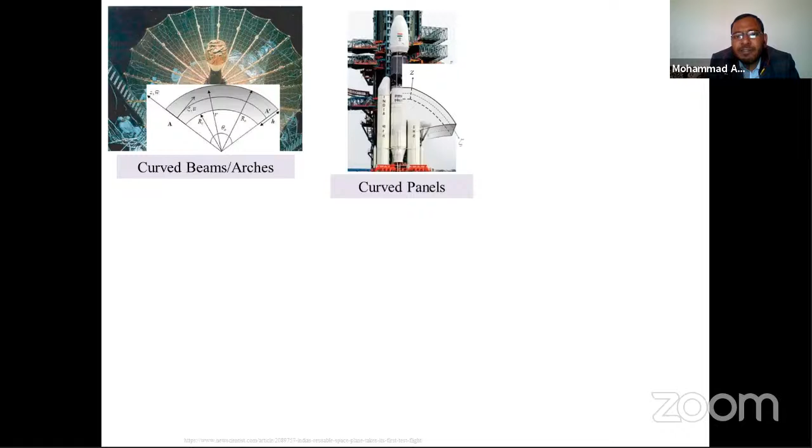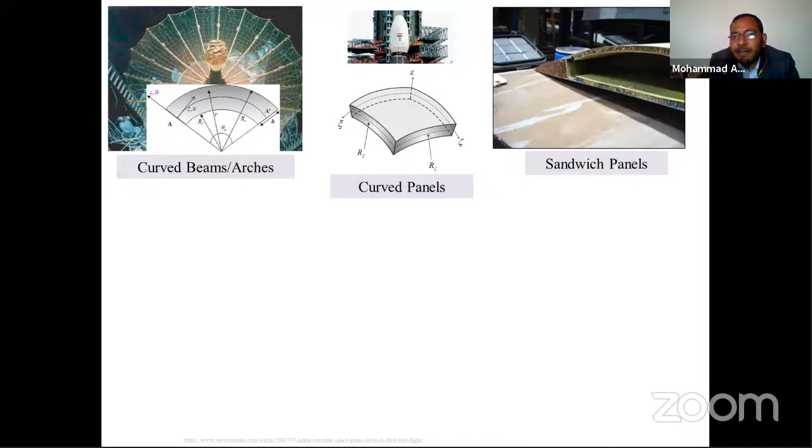Functionally graded materials, like curved panels, can also be used in various aerospace structures, like this Chandrayaan project, I think it's ISRO's project. The functionally graded structure made of graded cellular core makes it very useful where we need very low weight and good strength, meaning very good specific strength and specific stiffness. So we can use this structure in aerospace industry also.

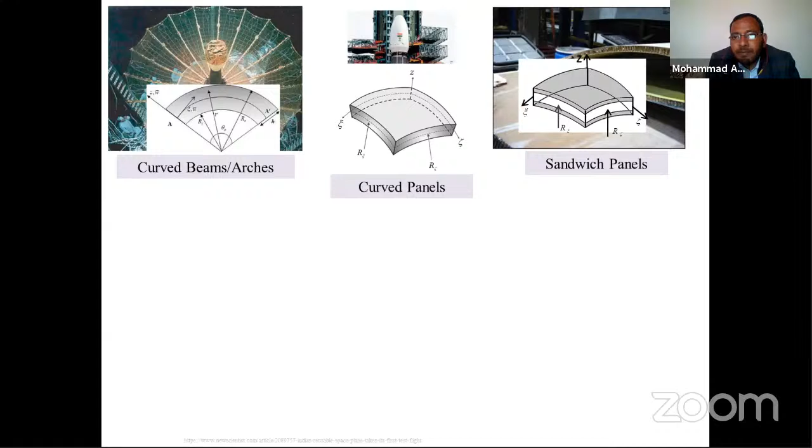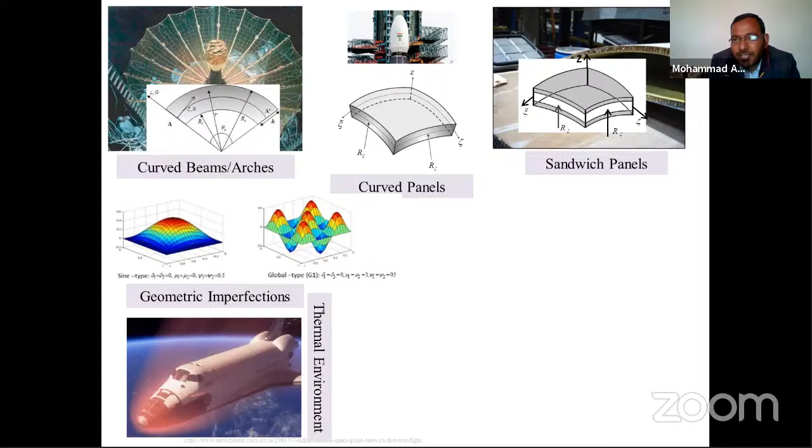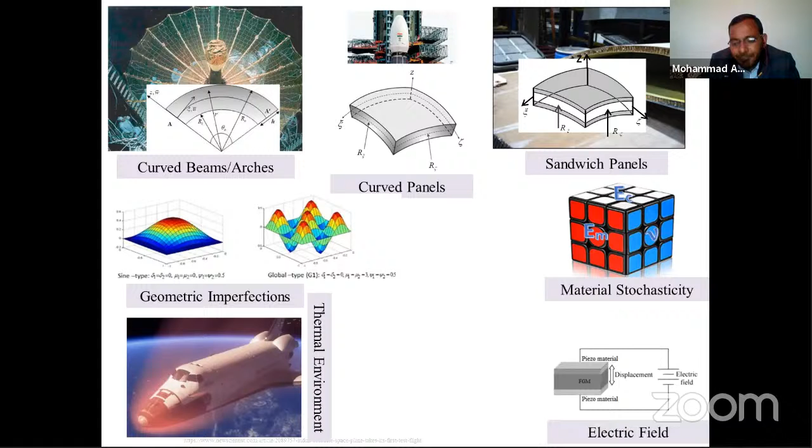For analyzing these complex structures and materials, we need to incorporate various influencing parameters like geometric imperfections, which is just unwanted distortion present in the structure. Another influencing parameter is environmental condition, when entering into the atmosphere any plane or object faces very high temperature thermal environment conditions, so it must be included in the structure so we get a more reliable structural response. And material stochasticity, since there is always randomness in the structure, we have included randomness in the material properties. And the effect of electric field. By incorporating all these influencing parameters within the kinematic model, we get a more realistic and accurate structural response.

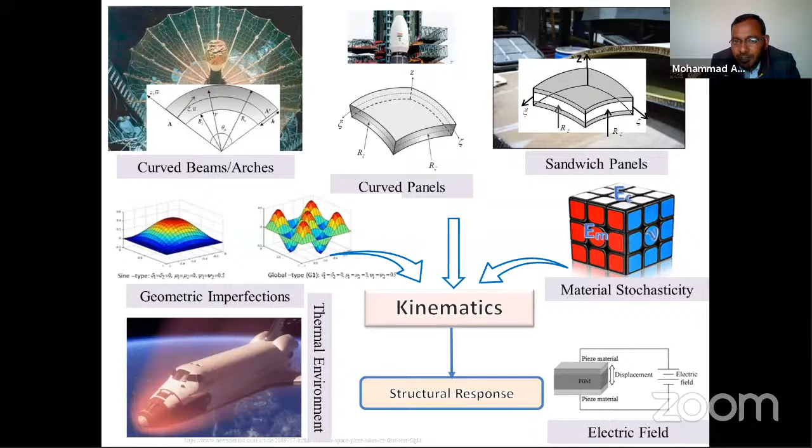What is the functionally graded material? Functionally graded materials are very advanced composite materials in which either composition or microstructure varies locally during manufacturing, due to which mechanical and thermal properties vary smoothly and continuously in the preferred directions. This gradation in the material properties reduces stress concentration, thermal stresses, and residual stresses. What is the functionally graded material? Here we are talking about the material.

Basically, functionally graded materials are categorized into two groups. One is functionally graded material due to variation in composition, and another is variation in material properties due to variation in their microstructures. For type 1, it's just variation in composition, generally made of ceramic and metal. So the functionally graded material is made of material A and material B, generally ceramic and metals. The composition varies from one surface to another, and accordingly the material properties also vary in that particular direction.

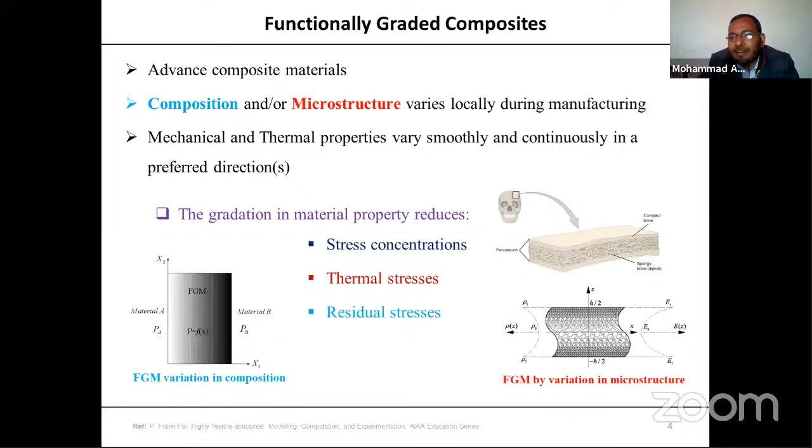The functionally graded structure, or cellular structure, is where the variation in material properties is due to variation in the microstructures. It is also available in nature, like we can observe in bamboo stick, bone, or even skin. These also have gradation in their material properties. Like bone, when we observe from outside it's hard, and when we go inside it starts becoming spongy.

Application of the functionally graded structures. These are very useful in various industrial applications like aerospace, nuclear reactor, medical applications, and energy. The graded cellular structures, as discussed earlier, are very similar to bone, so they are very useful in case of artificial bones and dental cases.

They can be used as bone implants or dental teeth implants. Another feature: functionally graded materials are generally made of ceramic and metal. These structures can be very useful where exposed to high thermal environment conditions, because ceramic can withstand very high thermal conditions, while metal, since ceramic is generally brittle, when mixed with metal also provides toughness. So these structures are very useful in aerospace applications where exposed to high thermal environment conditions.

It can be very useful for nuclear reactor walls, and many other applications like sports. Nowadays different building materials and sports goods are prepared from functionally graded materials.

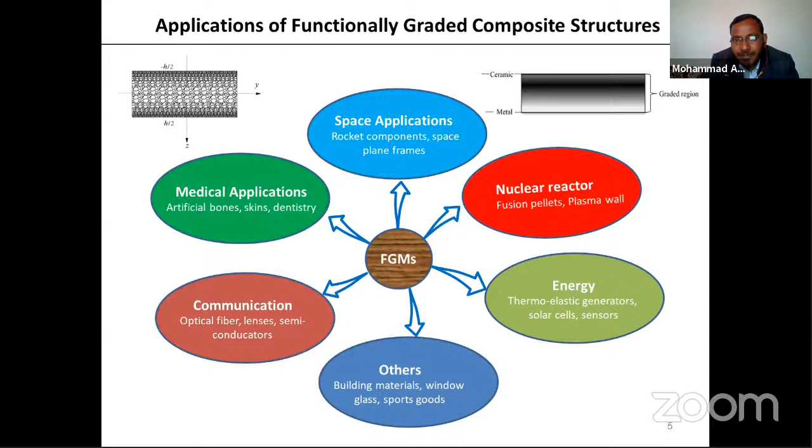Now, this is how we obtain the gradation in the material properties. Here we are discussing the functionally graded material made of ceramic and metal, a composition or mixture of ceramic and metal. The effective material properties vary in the thickness direction only, and for that we consider a power law distribution, where the volume fraction of the ceramic depends on the thickness coordinate z by h and the index n.

By selecting the value of n, we get different volume fraction indices, meaning different volume fractions of the ceramic. Using the rule of mixtures, the volume fraction of ceramic plus the volume fraction of metal equals 1. Accordingly, using the rule of mixtures, we get effective material properties of the structure like Young's modulus, density, Poisson's ratio, and other mechanical properties.

So Ez is equal to Ec minus Em, multiplied by the component volume fraction of the ceramic, plus Em. Here we can choose the value of n for different materials.

If we select n equal to 0, it will purely behave as a ceramic material, since this component becomes 0 and, by putting n equal to 0, this becomes 1. Then Em and Em get cancelled, and it acts purely as the ceramic component.

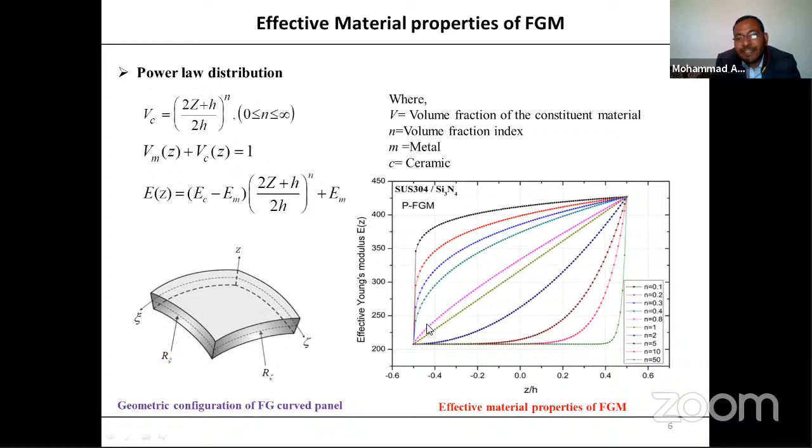Now we discuss another kind of functionally graded structure, generally called the cellular structure. Based on the open cell approach, we have obtained the effective material properties and how they vary along the thickness direction.

From this figure we can observe that the porosity is maximum at the center, while the top and bottom surfaces are generally less porous. So the effective material properties will reduce the most at the center, while the top and bottom surfaces will reduce less.

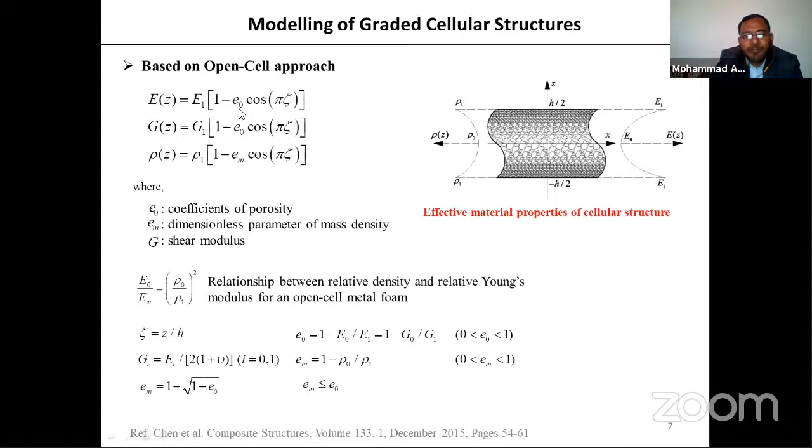The effective material properties can be obtained using this formula. In our study, we considered three different types of pore distribution in the graded cellular structures: type 1, type 2, and type 3.

Sir, we lost your connection.

Maximum porosity occurs at the center, so accordingly...

Hello, sir, we are losing your voice in the middle. Hello, sir, we are losing your voice in the middle. Yeah, okay, am I audible now? Yes, sir, yes, sir, okay, okay, ma'am.

In case of type 1 distribution, the effective material properties are minimum at the center because it has maximum porosity at the center. For type 2, the maximum porosity occurs at the bottom surface, so the effective material properties vary accordingly.

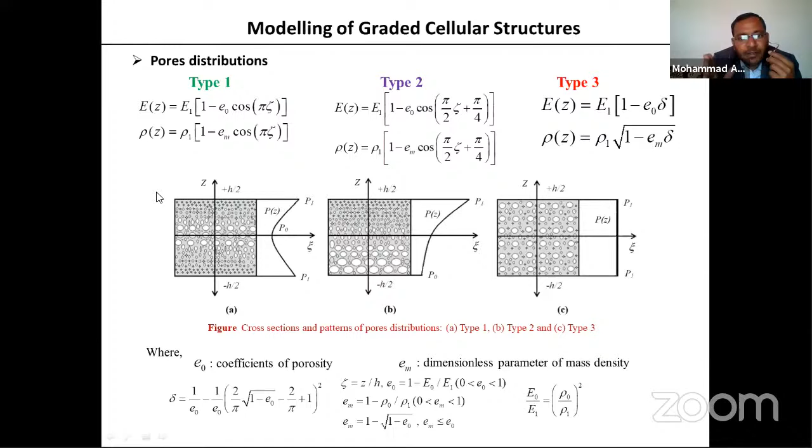In the third case, it's a uniform distribution, meaning the pores are uniformly distributed throughout the structure, so the effective material properties have nearly constant values.

Now moving to the modeling of the various influencing parameters, like geometric imperfection, thermal environment condition, and other influencing parameters. First, I will discuss initial geometric imperfections.

What are these? We expected a flat plate, but we get some sort of distortion in that structure, observed in this figure. So we have to consider these distortions. These are unavoidable because they occur during the manufacturing process. Functionally graded materials are manufactured at high thermal environment conditions, at high temperature, and then suddenly cooled to room temperature. There is a very high chance to get distortion in the structure, so these are unavoidable conditions, like geometric imperfection.

To model these type of imperfections, we have a very generic function, w bar is equal to some equations. Here, eta is the maximum imperfection amplitude, and h is the thickness of the structure. This whole function depends on various constants like delta 1, delta 2, psi 1, psi 2, and A and B, which are the dimensions of the structure, like if it's a plate, one side is A and another side is B. By putting suitable values of delta 1, delta 2, psi 1 and psi 2, we get different types of imperfections.

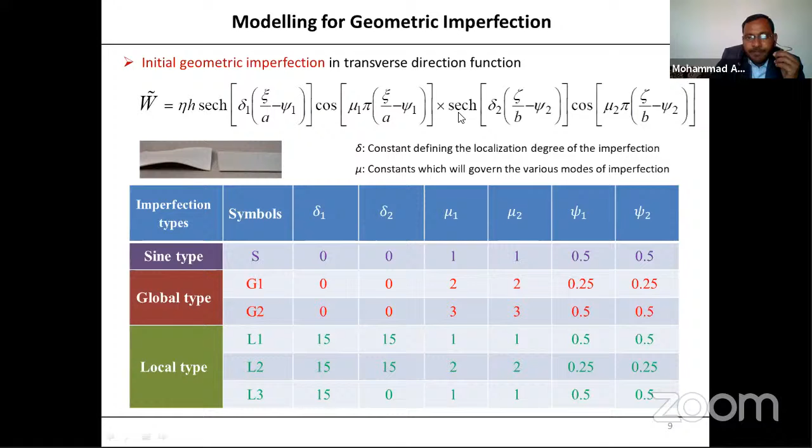I have categorized the imperfections into three categories: sine type imperfection, global type, and local type. By selecting different values of constants delta 1, delta 2, psi 1, psi 2, mu 1, mu 2, we get different shapes, presented here. These are mostly exaggerated views of distortions. Sin type imperfections are sinusoidally distributed along the structure, global type imperfections are globally distributed throughout the structure, and local type, L1, L2, L3, occur locally in any place. By suitably selecting the values of those constants, we get the desired shape.

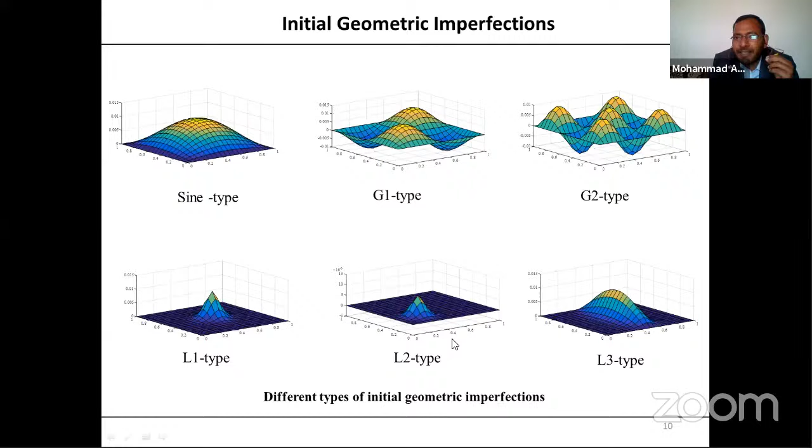Now the thermal environment condition. In my study, I have included temperature dependent material properties. How do we obtain the temperature dependent material property? Its equation is given by Reddy and Chin in 1998. For different values like P naught, P1, P2, and P3, we obtain these constants from a given table.

And the temperature dependent value, like T, we have considered two models for the distribution of temperature in the structure. One is uniform distribution, meaning it's just an assumption that the temperature of the whole structure is constant. Another case is linear temperature rise, meaning one surface has higher temperature and another is at lower temperature, with the temperature varying linearly from top surface to bottom surface.

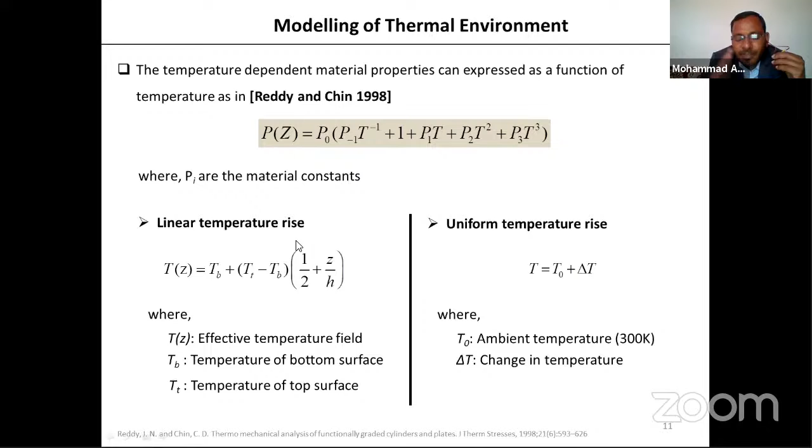These are the constants P1, P naught, P2, and P3. These constants are available in the literature, so we get these values from the literature. Now moving to the mathematical formulation.

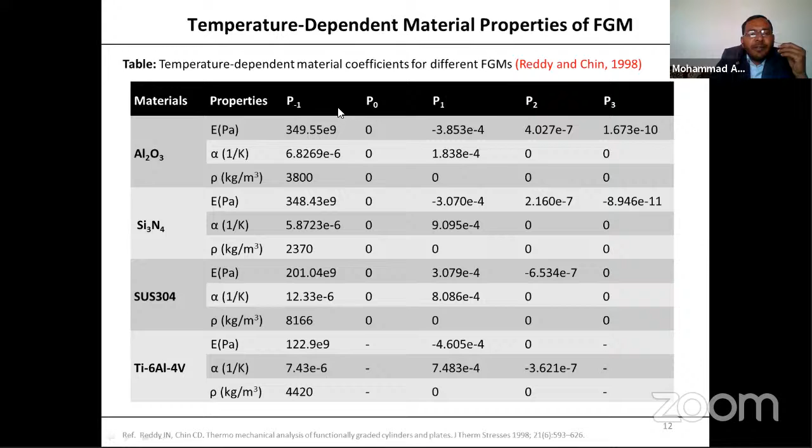For this, I have selected a very simplified structure, just a curved beam, and for this we have presented the displacement field. The displacement field is based on Reddy's higher order shear deformation theory, where by incorporating C naught continuity, W and del W by del xi are considered independent degrees of freedom. So in this case, we have assumed theta is equal to del W by del xi.

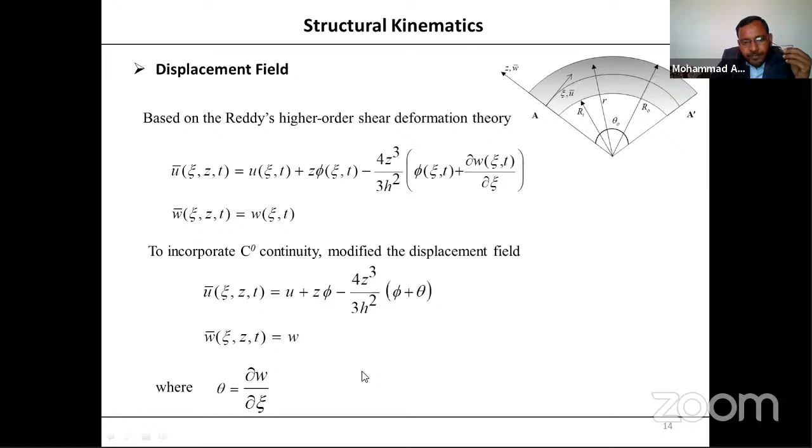This is the strain displacement relation for the curved beam. I have also included Lame's parameter, which takes care of the nature of the curved beam, as well as covers thin to thick beam behavior, meaning this formulation can be applied to thick as well as thin structures.

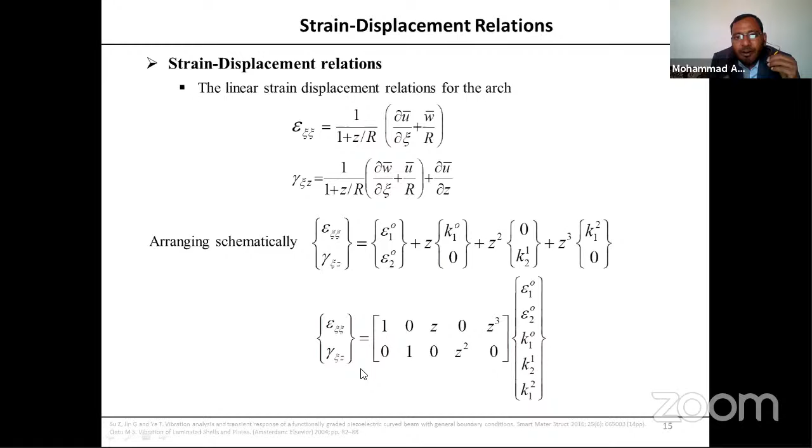Now moving to the slide where we have used the smart material. We are using a functional smart material structure, so in this case I have used piezoelectric material. The constitutive relationship for the piezoelectric material is presented here. We can observe that stress also depends upon the applied electric field, so when we apply the electric field, the stress in the structure also changes.

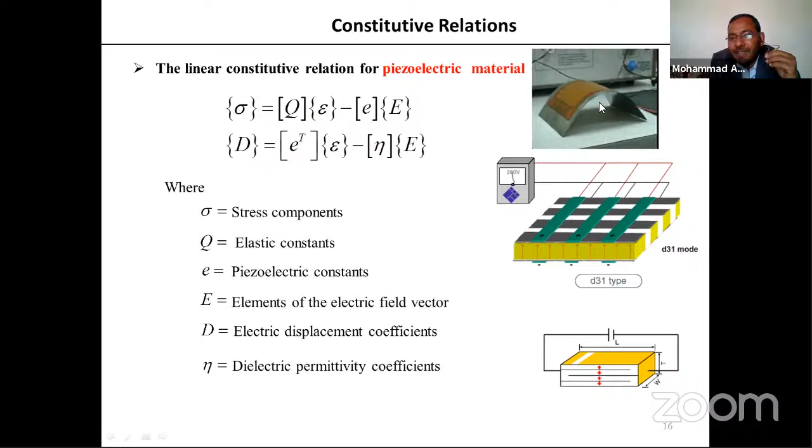We can observe from these figures that when we apply the electric field, the structure also gets deformed accordingly. Now, how do we obtain the elements of the electric field? In this case, we have a small assumption: we assume that only the z direction, the transverse direction electric field, dominates, and the other two in-plane electric fields, in x and y direction, are assumed to be zero.

How is the electric field obtained? It's the gradient, meaning gradient of the electric potential. V here is the applied voltage, meaning potential difference, and h p is the thickness of the piezoelectric layer.

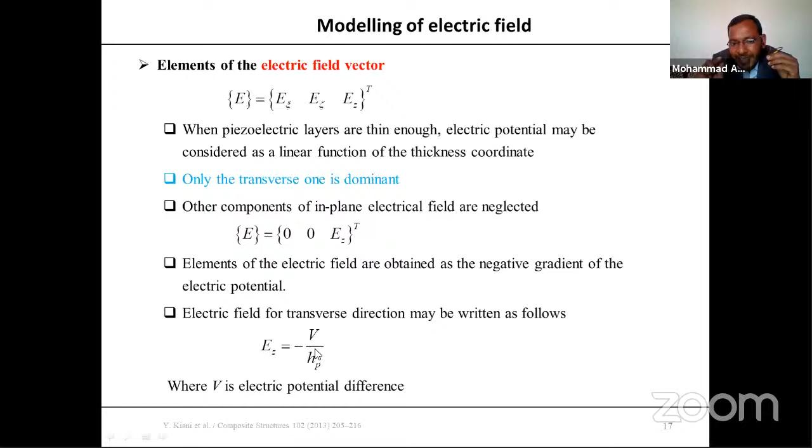For the analysis, I have used functionally graded solution methodology, considering the finite element method as the solution approach. I have considered a three-noded beam element with 4 degrees of freedom at each node, and the shape functions are written here.

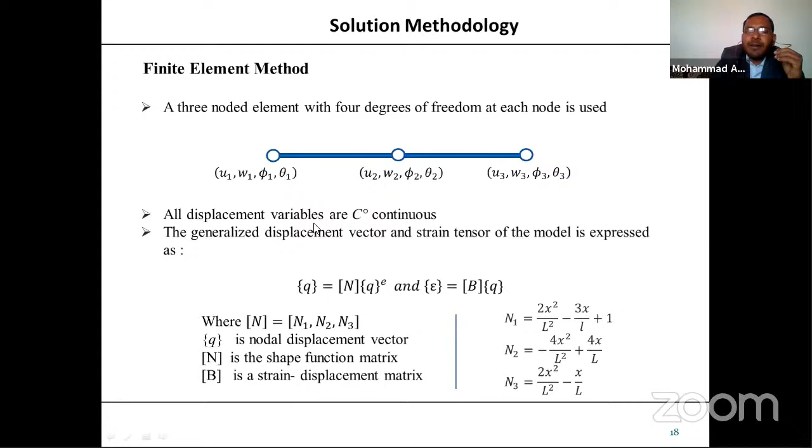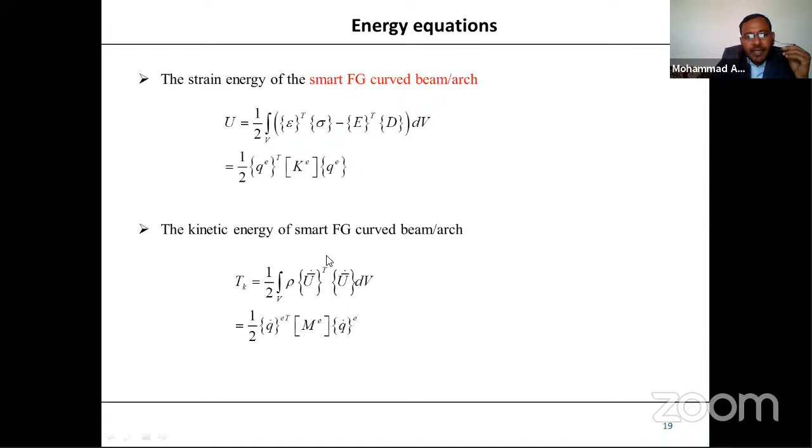I am considering all variables as C-naught continuous. This is the strain energy equation for the structure, smart FG, and another is kinetic energy, using the variational principle, which is a modified variational principle.

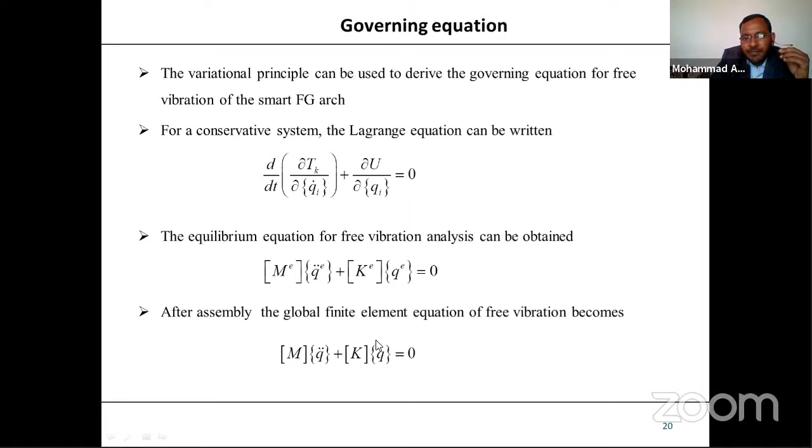Now, moving to the nanostructures. What are nanostructures? They are structures where at least one dimension is in nanometers, varying from 1 to 100 nanometers. These are classified into three categories: one dimensional, 2D, and 3D nanostructures.

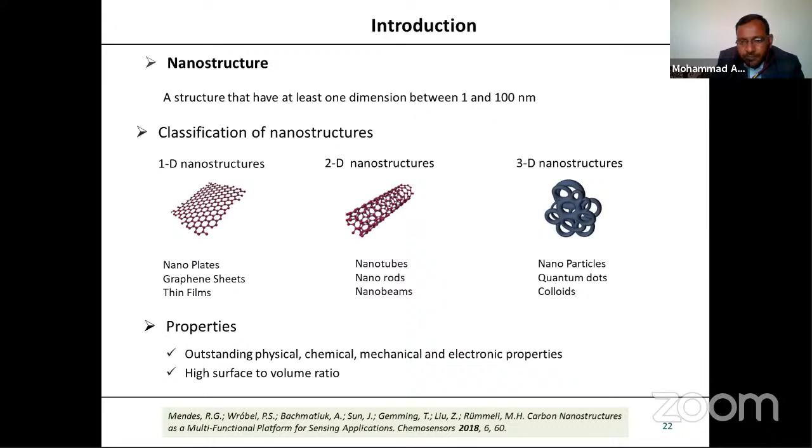Why are they useful? Because they have outstanding physical, chemical, and mechanical properties, and a high surface to volume ratio. Because of this, they are very useful in various structures and applications across various fields.

Materials are light, stronger, and durable, and they are also resistant to extreme load conditions.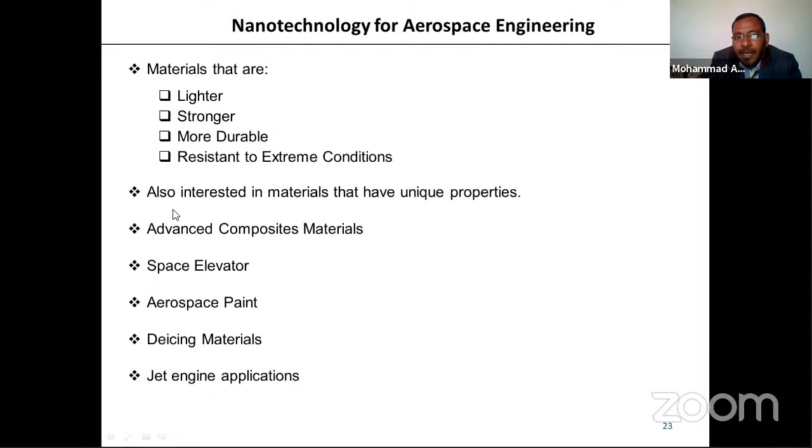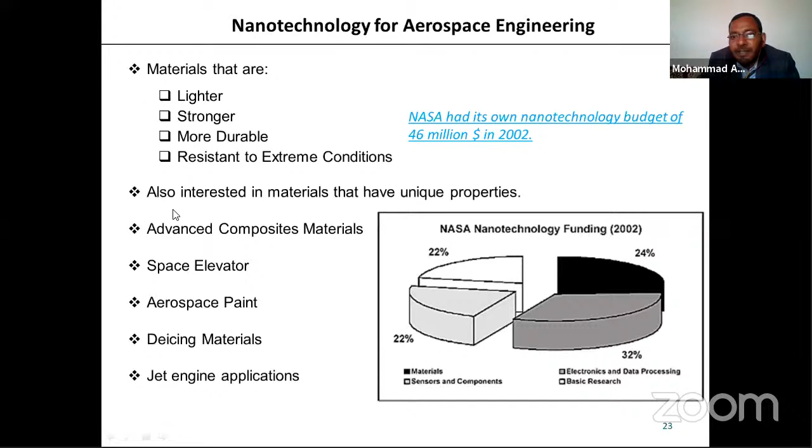We observed from previous data that NASA's nanotechnology funding in 2002 was around $46 million, and this amount is divided into four categories: development of new materials, sensors and other components, electronics and data processing, and other basic research. It's a very significant contribution to the total budget, meaning nanotechnology research is contributing a lot to their overall research.

Other applications for nanostructures include nanosensors and reinforced composites, like graphene platelets and carbon nanotubes. These carbon nanotubes and graphene platelets are added to composites, making them more strong and stable, without significantly increasing weight.

So the weight does not increase too much, but the strength increases. These types of reinforced composites are nowadays very useful for aerospace applications. Many other applications of nanostructures include energy harvesting, probes, tissue engineering, and drug delivery.

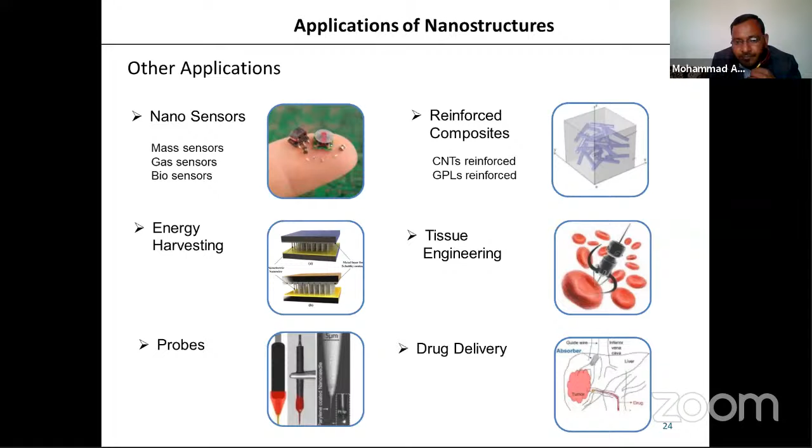To model nanostructures, when analyzed using classical methods, it does not give accurate answers compared with experimental results. For that case, modeling of these nanostructures has to consider modified theories like non-local elasticity theory, strain gradient theory, stress gradient theory, and many other modified theories, because classical theories available in the literature do not give accurate results.

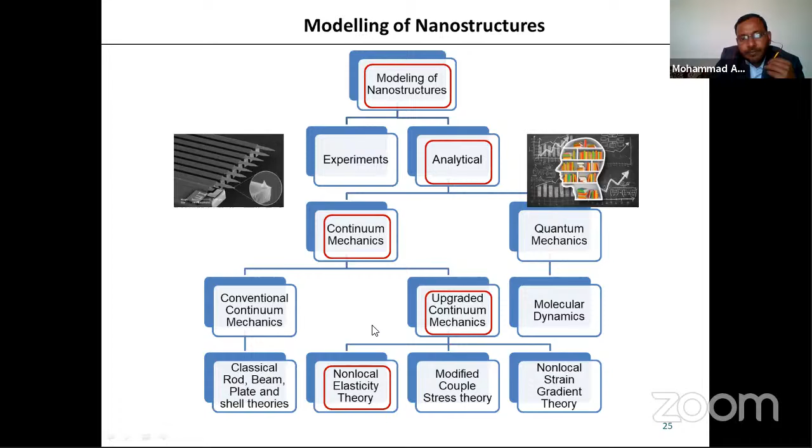In my case, I have considered an analytical method based on non-local elasticity theory. How did non-local elasticity theory come into existence? In 1972, Eringen and Edelen proposed non-local elasticity theory, based on an integro-partial differential equation, and it was very tough to solve this equation.

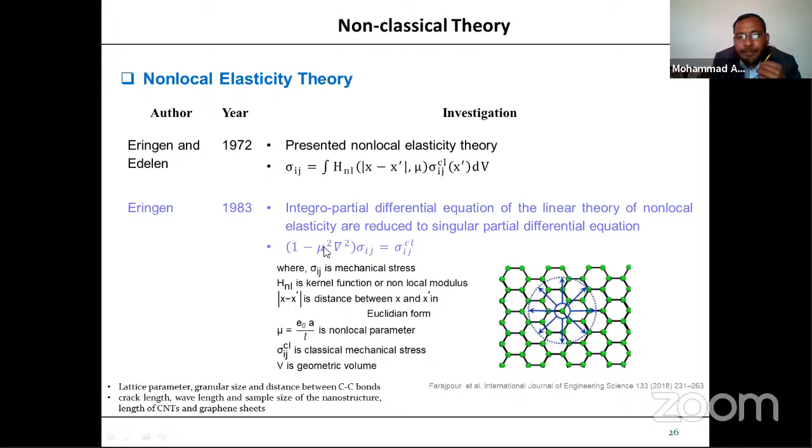So in 1983, Eringen proposed another theory, modifying it to avoid the complexity associated with the integro-partial differential equation. In this theory, he has only a differential equation term, where mu is a constant non-local parameter which depends upon the material as well as geometry.

The modeling of nanostructures is very similar to the classical formulation, meaning classical beam theories, where we are also using higher order shear deformation theory.

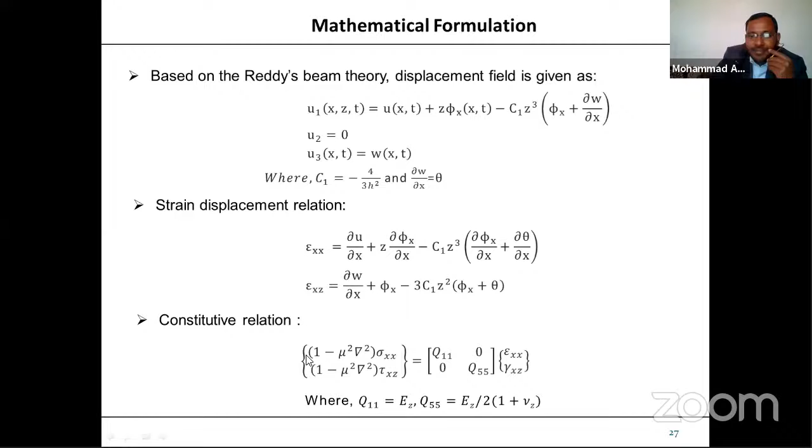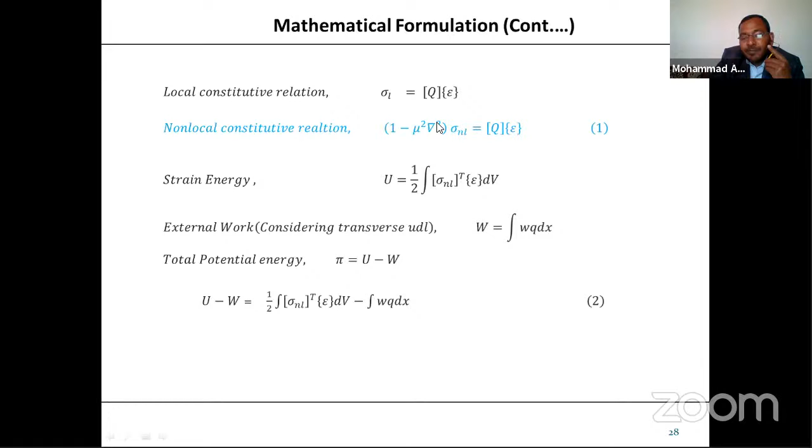But the only difference is in the constitutive relation. In the classical case, stress is directly related to strain. But in this non-local theory, the constitutive relation depends upon non-local parameters as well as their derivative, meaning the derivative of the stress component.

So we found that there is a good agreement between the results.

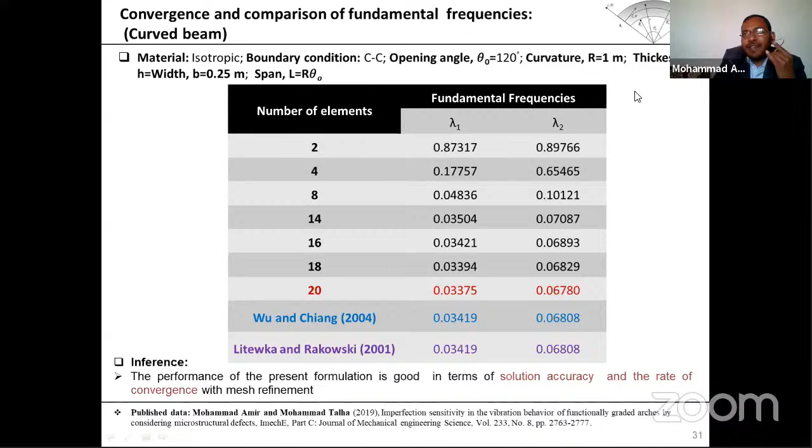Whenever we discuss the opening angle, it means the span is increasing. With radius constant, the span increases by increasing the opening angle.

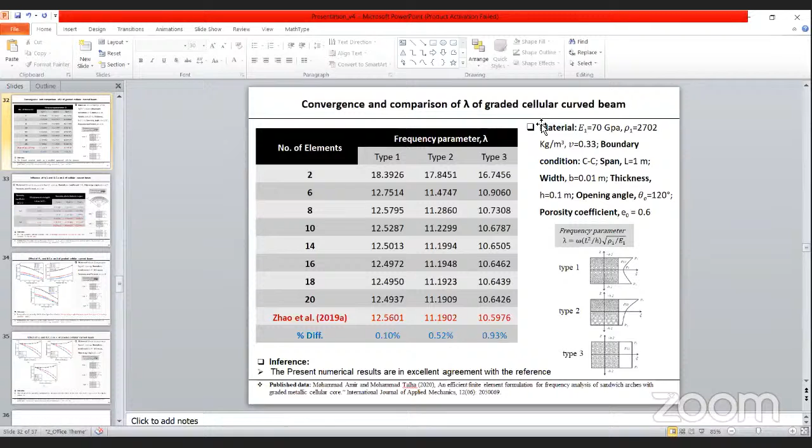Here the convergence and comparison for the frequency parameter, lambda, of the functionally graded curved beam is presented. In this case, I have considered three different types of material porosity distributions - this is a graded cellular structure.

We have considered three different types of porosity distributions, and the effective material properties taken are E1 equal to 70 GPa, density is 2702 kilogram per meter cube, and Poisson's ratio is 0.33. The geometric properties like boundary condition, length, width, and opening angle are given.

What is the porosity coefficient? It is the measure of overall pore volume fraction of the pores available in the structure. Here E naught is considered as 0.6.

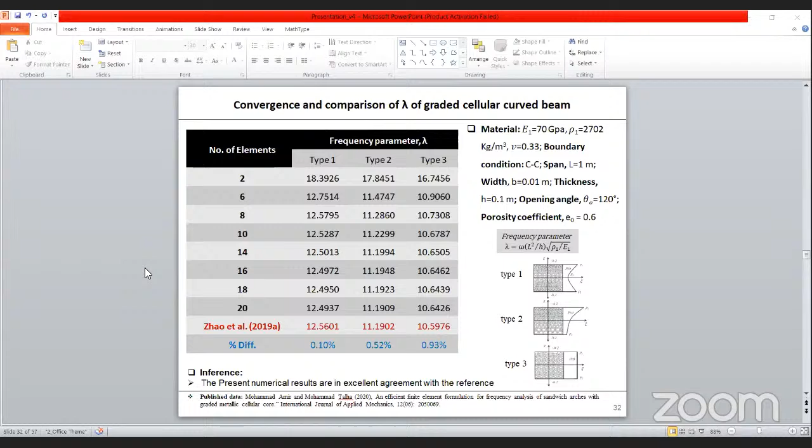From this particular convergence and comparison study, we found our model is very efficient, giving a converged result at the number of elements equal to 20. We found there is a good agreement between the results, meaning a very small difference at n equal to 20 elements, giving a very close result.

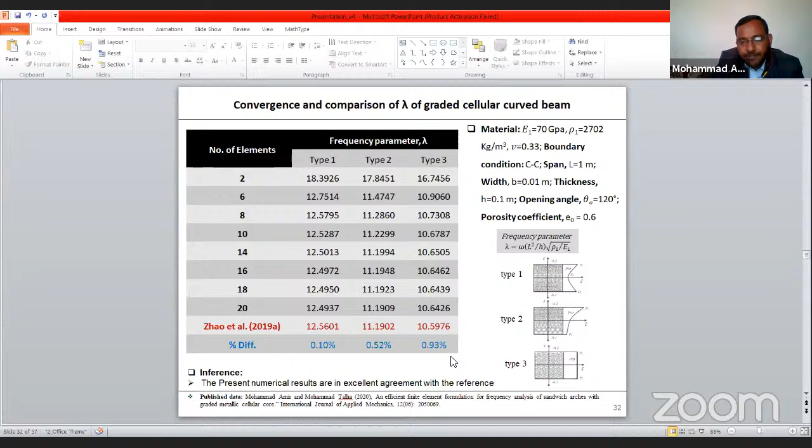Here we observe the influence of the L by H ratio, that is thickness to length ratio, and the boundary conditions on the frequency parameter of the graded cellular curved beam. Here we consider the porosity coefficient E naught equal to 0.6, and material properties as taken earlier, with the boundary condition clamped, and the opening angle is 120 degrees.

In this result, I have considered three different types of porosity distributions: type 1, type 2, and type 3. We compare results presented for various porosity coefficients like 0.2 and 0.4, and thickness to length ratios of 0.02, 0.05, and 0.1.

We observed that on increasing the L by H ratio from 0.02 to 0.1, the frequency parameter also increases with the increase in curvature, meaning thickness to length ratio. And with increasing the porosity coefficient, the frequency parameter depends upon the type of porosity distribution used. I will explain this later.

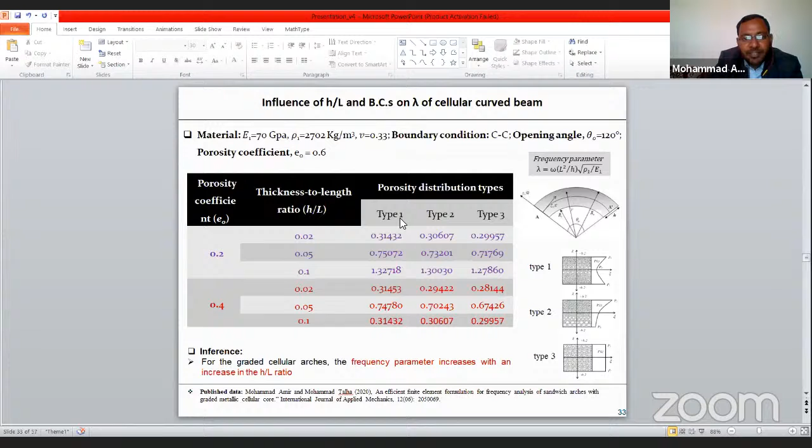Here is the effect of opening angle and boundary conditions on the frequency response of the functionally graded curved beam. The material properties are given here, and boundary conditions are clamped-free and simply supported. Thickness to length ratio is 0.02, and E naught, the porosity coefficient, is 0.8. Three different types of porosity distributions are also considered, and the non-dimensionalized frequency parameter is taken as omega L square by H under root rho 1 by E1.

So we found the effect of opening angle, with the graph plotted against frequency parameter versus opening angle. On increasing the opening angle, the frequency parameter decreases for clamped and simply supported boundary conditions, while in case of clamped-free boundary condition, it increases. So it can be concluded that the effect of opening angle also depends upon the type of boundary condition used.

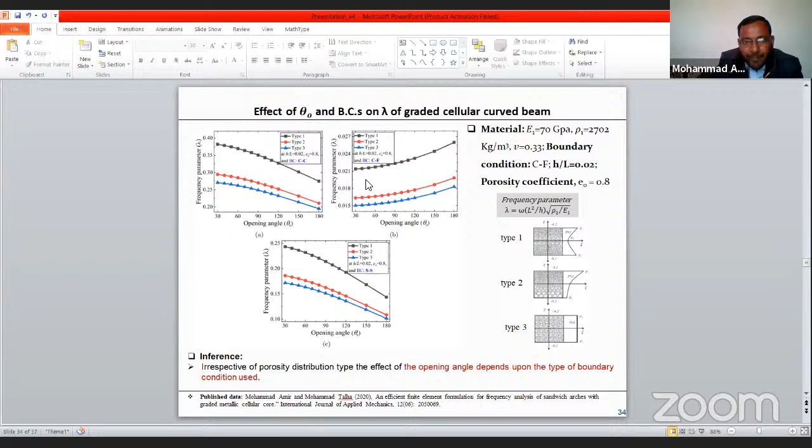Here, the effect of porosity coefficient, as I discussed earlier, and the boundary condition on the frequency parameter of the functionally graded curved beam. I have also considered three different types of porosity distribution for the graded cellular structure: type 1, type 2, and type 3. The geometric and material properties are given here, and the opening angle is just 120 degrees.

We found that on increasing the porosity coefficient, the frequency parameter increases for type 1, but for type 2 and type 3 it is decreasing. This means the effect of porosity coefficient depends on the type of porosity distribution taken. In case of type 3, it gives maximum effect at higher values of porosity coefficient E naught. Let's say at 0.8, it gives maximum deviation from the standard one.

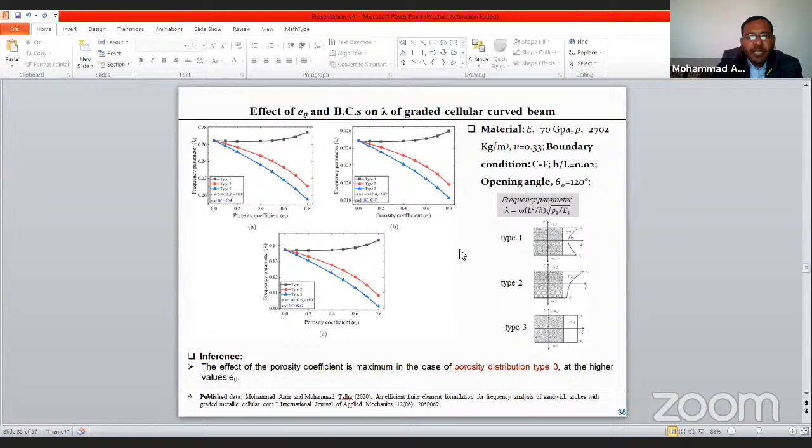Now moving to the vibration analysis of the sandwich structures with a graded cellular core. In this case we have considered the sandwich structures, which generally have face sheets and the core. I have considered the face sheets as isotropic material with constant material properties, but the core has graded material properties. The previously defined three types of porosity distributions are considered for the core only, and the top and bottom face sheets are constant.

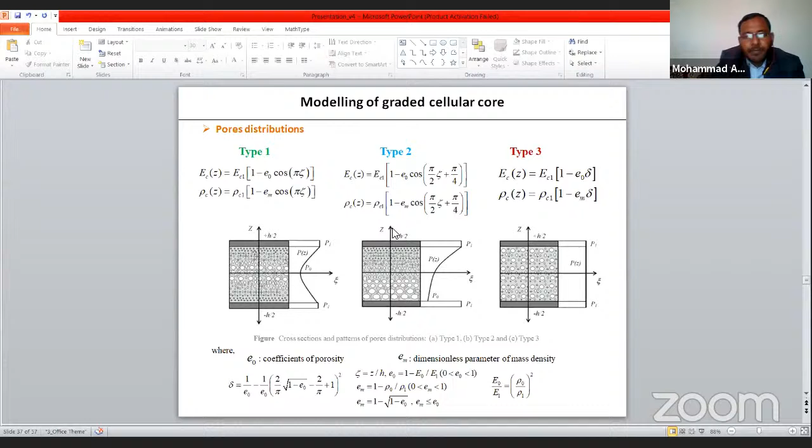Here, the convergence study for the frequency parameter of the straight sandwich beam is presented, because the curved sandwich beam results are not available in the literature. So I compared with the straight beam results. To obtain the results for the straight beam, we just put the radius of curvature r equal to infinity, and we get the results for the straight beam.

For the sandwich beam, there is a very useful parameter called thickness proportion: the thickness of the face sheets and the thickness of the core. So the proportion of thickness is 1 is to 10 is to 1. This particular proportion of thickness is considered throughout the study.

So we compared our results with the reference result, and we found there is a good agreement between the results. Even for the straight beam, it gives earlier convergence, converging at a total number of elements equal to 12.

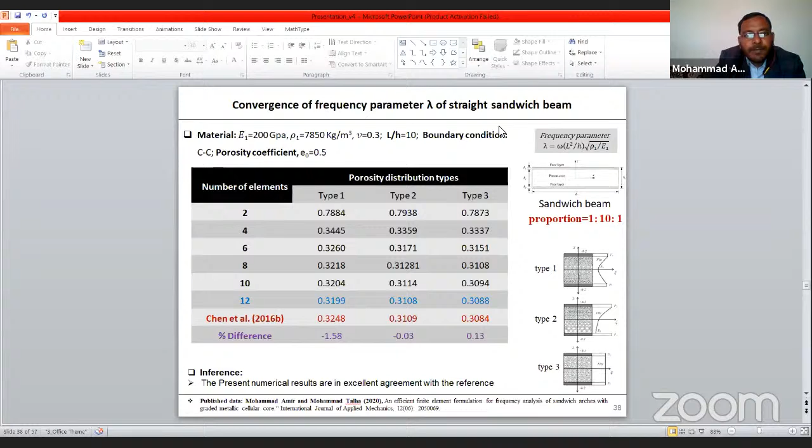Here the convergence study is presented for the isotropic material, where the core is considered isotropic as well, so the overall structure is isotropic, and the proportion of thickness is 1 is to 27.7 is to 1, as taken by Ahmad in 1971.

The material properties and other geometric parameters are given, and the boundary condition is clamped, meaning fully clamped. The natural frequencies are calculated in hertz, and the first and second modes are compared. We found good agreement between the results, and for the isotropic beam it converges at number of elements equal to 14.

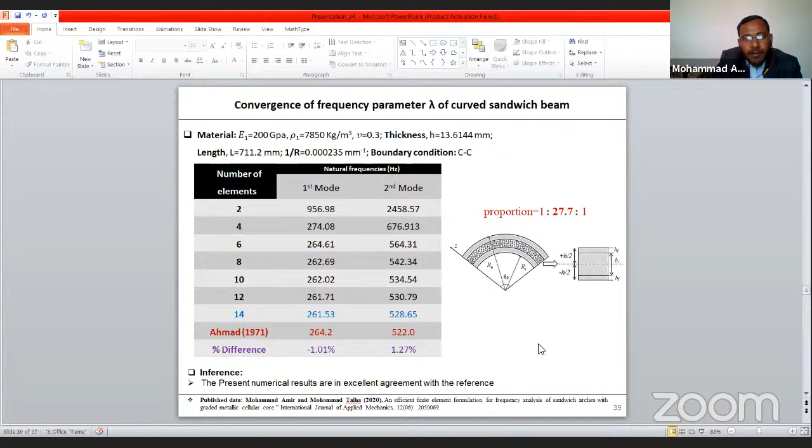Now, the effect of distribution types and boundary conditions is observed for this sandwich curved beam. Here we have considered two types of boundary conditions: clamped-free and fully clamped. By increasing the porosity coefficient E naught, the effect of these porosity distributions also governs and affects the frequency response of the structure.

Let's say on increasing the porosity coefficient for type 1, the frequency parameter is increasing, but for type 2 and type 3, it is decreasing, for clamped-free as well as fully clamped cantilever beams.

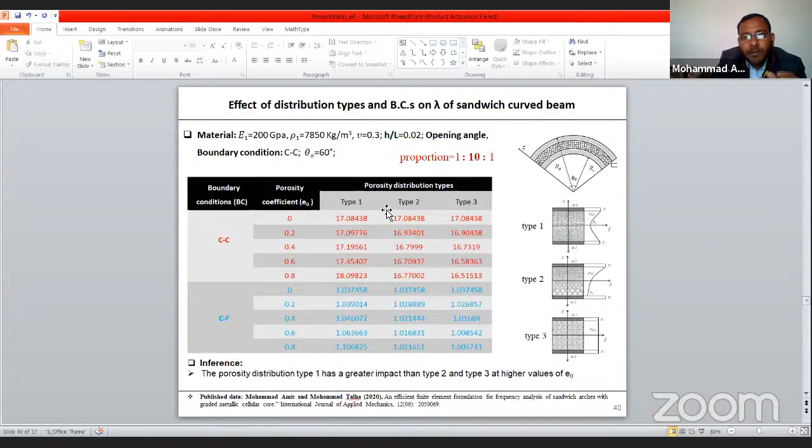Here, the effect of opening angle and boundary condition for the sandwich arch is presented. I have considered the thickness proportion 1 is to 10 is to 1, and three types of porosity distribution: type 1, type 2, and type 3. We found, as discussed earlier, that the effect of opening angle depends upon the type of boundary condition used.

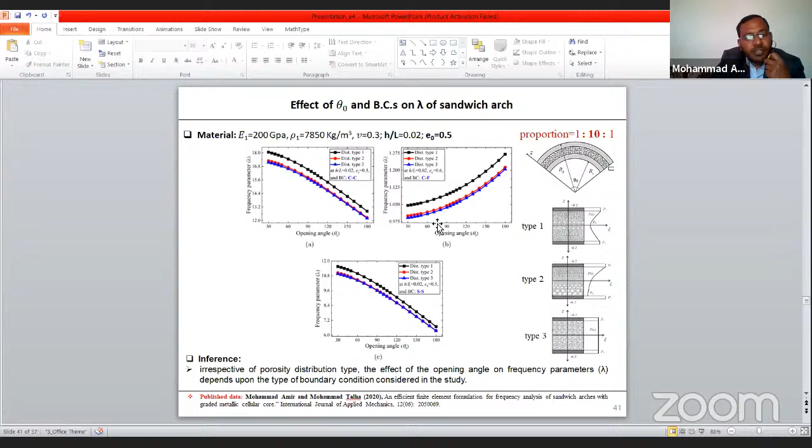Here, the effect of thickness to length ratio h by l and boundary conditions on the frequency response of the sandwich arch. I have considered opening angle theta equal to 90 degrees, and other parameters are given. By increasing the thickness to length ratio, the frequency parameter is decreasing irrespective of the boundary condition type.

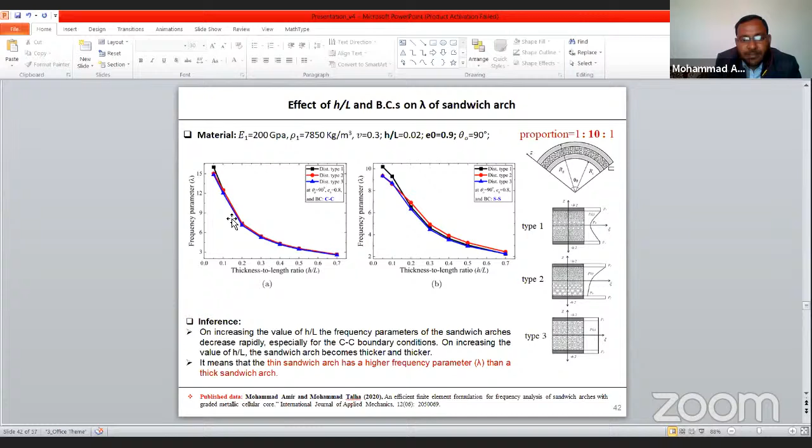By increasing the thickness to length ratio, it is changing from thin structure to thick structure. By decreasing the thickness while keeping length constant, its thickness by length ratio is decreasing, so the frequency parameter is getting higher and higher. It can be concluded that the frequency parameter is higher for thin sandwich arches than for a thick structure.

Now the free vibration analysis of the smart curved beam, where the effect of piezoelectric material is also included. Here the functionally graded material considered is titanium alloy and zirconia, a mixture of ceramic and metal. This is another type of functionally graded material where variation in the effective material properties is due to variation in the composition, a mixture of two materials, zirconia and titanium alloy.

Here the temperature dependent material properties are considered, and delta T is taken as 800 Kelvin. For the curved beam, the first two modes of frequencies are presented and compared with the reference result for two different H by L ratios, and we found good agreement between the results, converging at n, the number of elements, equal to 20.

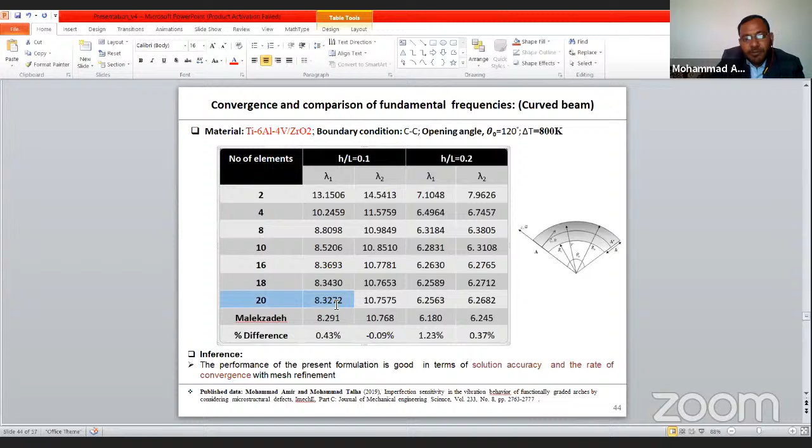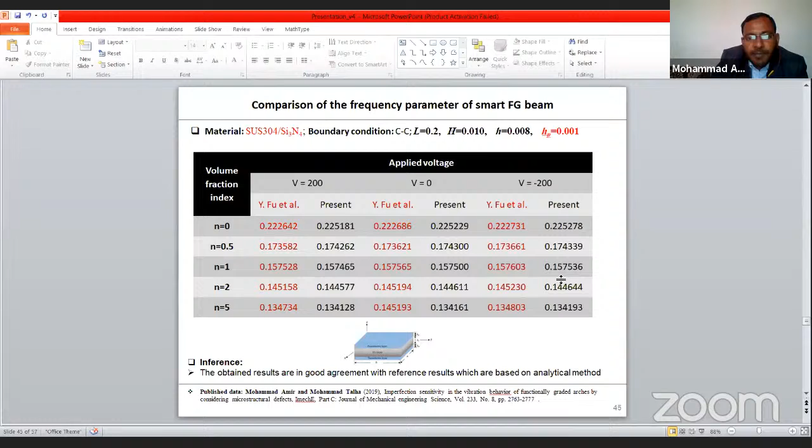The effect of applied voltage on the frequency parameters of the functionally graded beam is observed by increasing the applied voltage. Three potential differences are taken: 50 volt, 0 volt and minus 50 volt, for various volume fraction indices n equal to 0, 0.5 and 10.

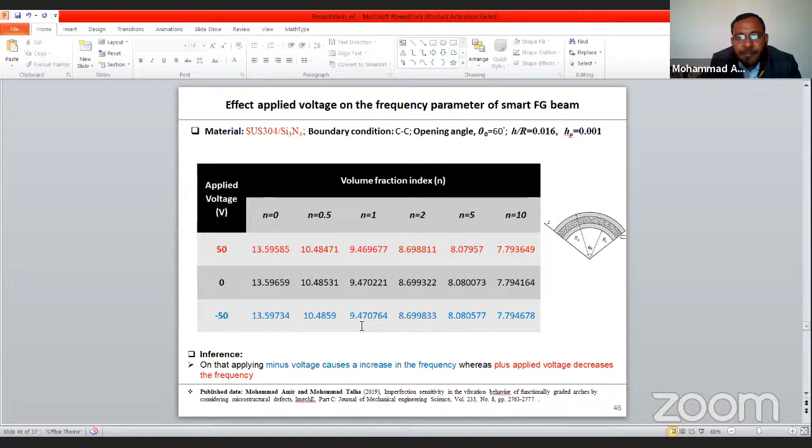We observed that by applying minus voltage, the frequency parameter increases compared to when no voltage is applied, that is, when applied voltage V equals 0. In the case of applying a positive voltage, plus 50 volts, the frequency parameter decreases.

Now moving to the vibration analysis of the nano beam. Here the most important parameter is the non-local parameter, mu, as we discussed during the modeling of this non-local theory.

In this case, I considered a straight beam having L by H ratio, meaning length to thickness ratio, of 100, as taken and presented by Eltaher 2012, and we found our result is quite comparable with the reference result for various values of mu, the non-local parameter. These non-local parameters depend on the geometric as well as material properties of the nanostructure.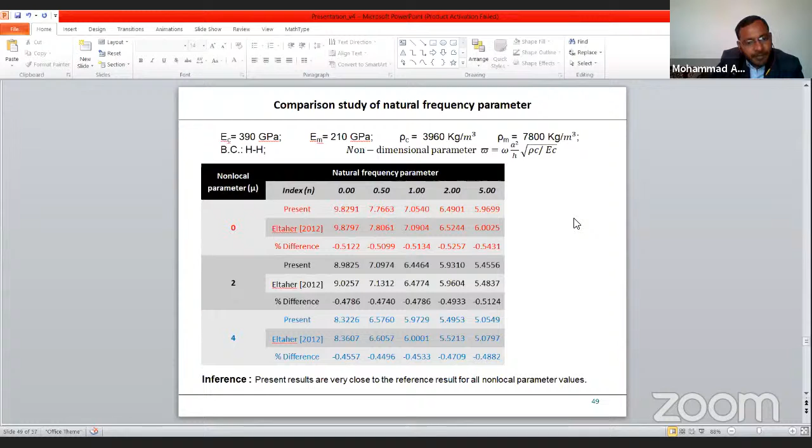Now we have observed the effect of non-local parameters on the first five frequencies of the nano beam. In this case, I considered a straight beam with L by H ratio of 100, and the effective material properties are given, considering ceramic and metal.

For the ceramic, EC is equal to 390 GPa, and EM is the metal modulus. The subscript C denotes the ceramic component, and the subscript M denotes the metallic component.

So the ceramic component and metal component, their material properties are taken as written here, and the boundary condition is simply supported. This is the non-dimensionalized parameter used to non-dimensionalize the frequencies. We have considered various non-local parameters, like 0 to 5, and we have also considered 5 different modes of the frequencies of this nano beam, and we observed that on increasing the non-local parameter, the frequency parameter decreases.

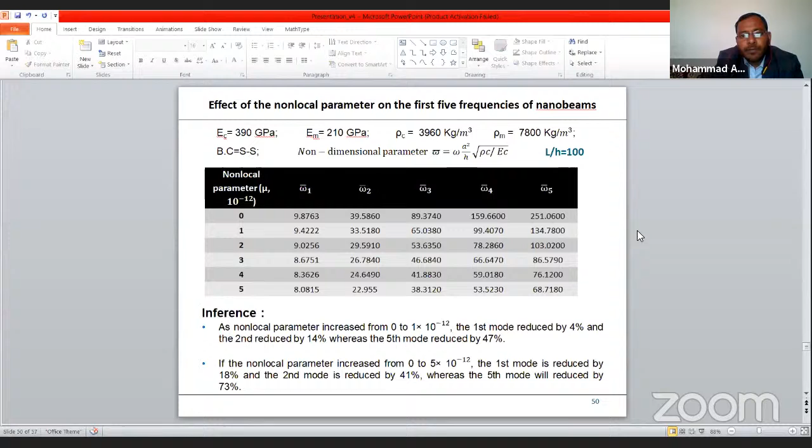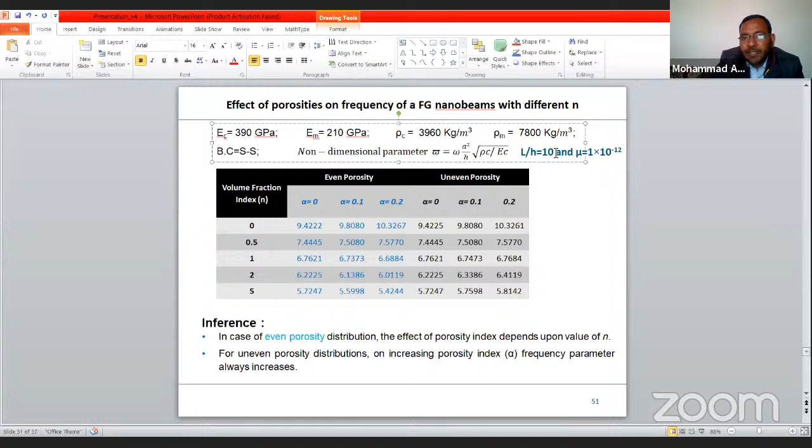Here, the effect of porosity on the frequency response of the functionally graded curved beam, the frequency response of the nano beam with different values of volume fraction index n. The ceramic and metal material properties are given here, and the boundary condition is simply supported. In this case, L by H ratio, that is length to thickness ratio, is 10, and mu, the non-local parameter, is considered to be 1 into 10 to the power minus 12.

We found results for various volume fraction index as well as porosity coefficient, denoted by alpha. We consider two types of porosity distributions: even distribution and uneven distribution. In case of even distribution, on increasing the value of n, the effect of porosity coefficient alpha is changing. For n equal to 0, the effect is increasing, meaning on increasing alpha from 0 to 0.2, the frequency parameter is increasing. But for higher values of n, it is decreasing. Whereas in case of uneven distribution of porosity, on increasing alpha from 0 to 0.2, the frequency parameter is always increasing.

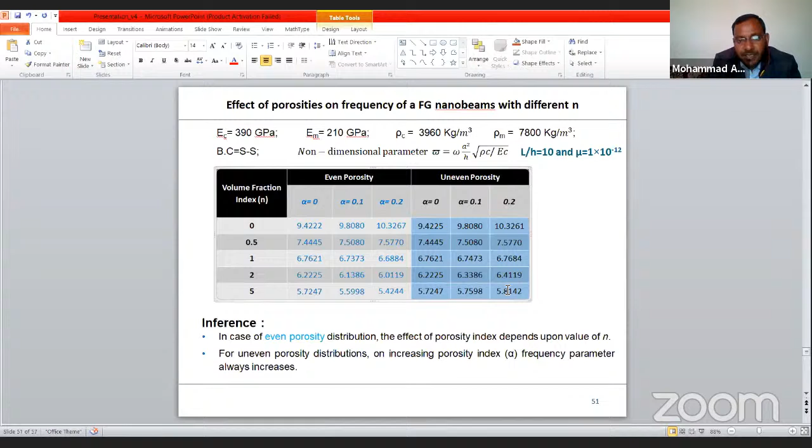Here, the effect of various geometric imperfections is presented. For this result, I have considered the geometric imperfection amplitude eta equal to 0.2, and for the perfect structure, the geometric imperfection amplitude is 0. For various volume fraction index, the results show that on increasing the imperfection amplitude, the frequency parameter is increasing. In case of G1, G2 types, the effect is maximum for G2, and in case of L2 type, the overall effect is minimum.

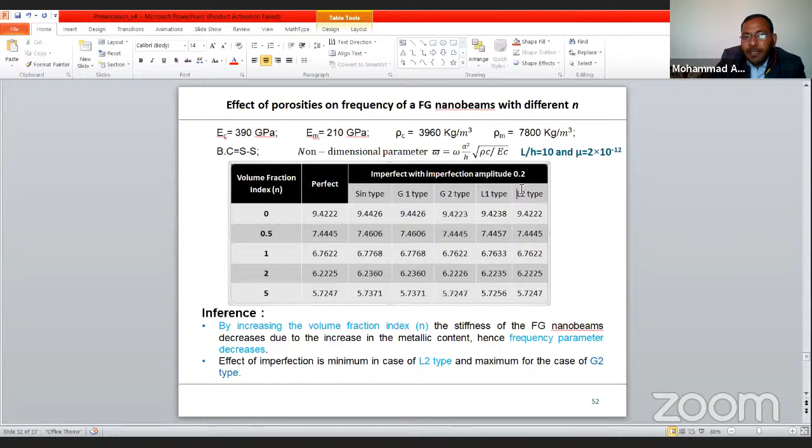By increasing the volume fraction index n, the frequency parameter is decreasing. Why is this happening? As discussed, by increasing n from 0 to infinity, the metallic content increases. For n equal to 0, ceramic content is maximum and metal content is 0. At n equal to 1, it's 50-50%, 50% ceramic and 50% metal. After 1 to infinity, on increasing n, metallic content constantly increases. Compared to ceramic, metals have lower elastic stiffness. So on increasing n, the stiffness of the structure decreases, and when stiffness decreases, the frequency will obviously decrease.

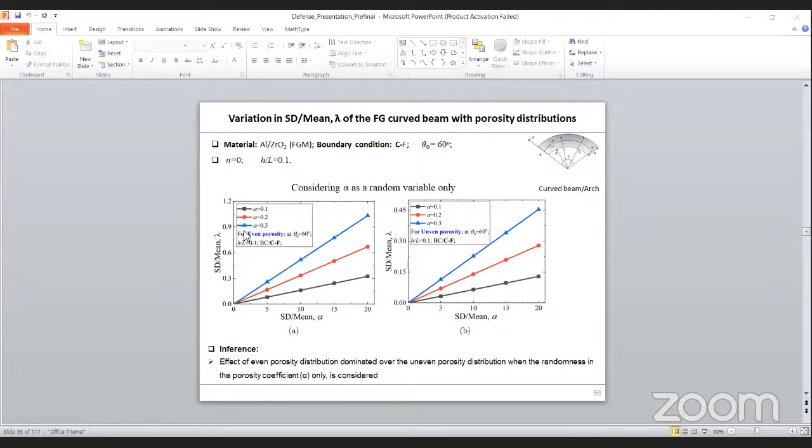So I am presenting stochastic analysis of the functionally graded panels. Here a comparison study is presented, as well as a convergence study for the standard deviation by mean, that is coefficient of variation, of the frequency parameter. When we assumed randomness in the material properties - for instance, randomness associated with the ceramic component's Young's modulus and the metal's Young's modulus is 1%, and randomness associated with the ceramic and metal component densities is 1% - then the overall randomness in the frequency response is observed. The effective mean values, that is the deterministic frequency response, as well as the stochastic component, meaning their deviation from the mean values, is calculated. We found that by increasing the volume fraction, the randomness in the response will decrease, and for this particular case the randomness is 0.54% for n equal to 0.5. We compared our result with existing results, based on first order perturbation method as well as random factor method.